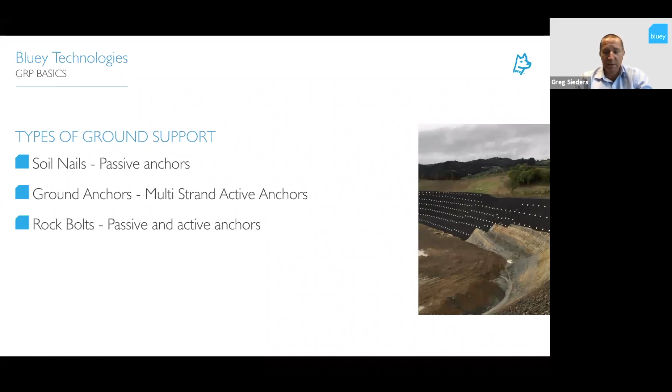The other option for corrosion protection is galvanizing, which does not give you the 100-year design life that double corrosion protection gives you. Other options in the marketplace are doing an epoxy coating, which can give you extended durability over galvanizing.

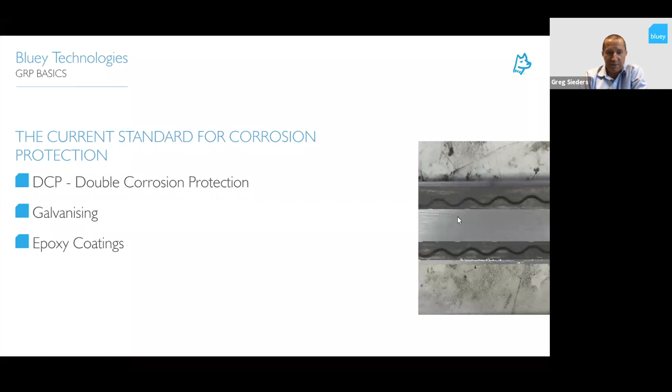These are the international standards for soil nailing and ground anchors that we mostly refer to across the marketplaces. BS 8006 is the British standard for soil nailing, 8081 is for your ground anchors or grouted multi-strand anchors, and then we have VicRoads Section 683 for soil nail walls.

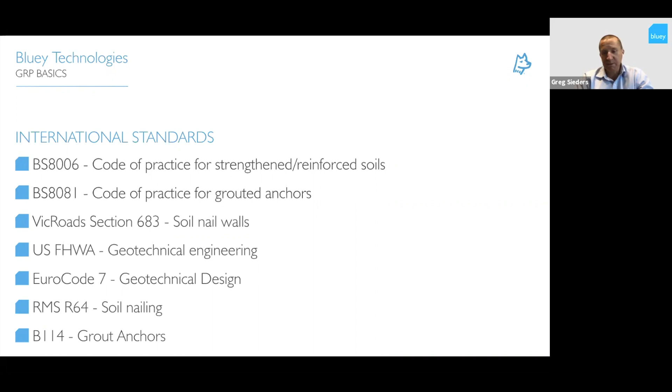So the Bluey GRP basics. What is GRP? GRP is referred to as glass fibre reinforced plastic or polymer. It can be noted as GRP, FRP, GFRP - they're all one and the same, made out of glass fibres. The last one, CFRP, is a carbon fibre, generally used for structural strengthening, not for your soil nailing or anchoring market, and a lot more expensive in that application.

For this purpose, in the presentation, we'll be referring to GRP, which is a continuously threaded bar.

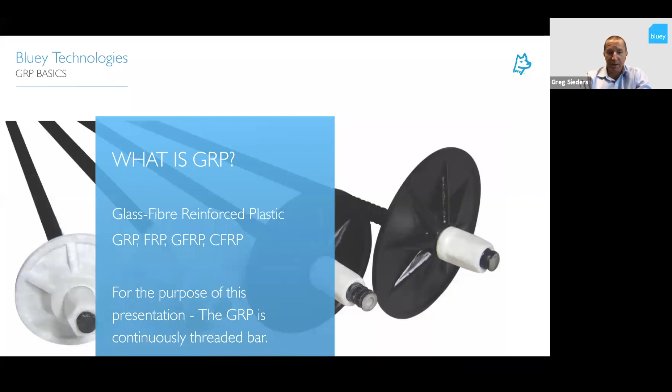How is GRP made? The most common practice for manufacturing GRP is a pultrusion process. You have a fibre bank at the back of the machine which has all the fibres, gets pulled through some machines into a resin bath, and then it comes out the other end in different shapes - can be made into straight bars, threaded bars, a whole range of different forms made out of GRP.

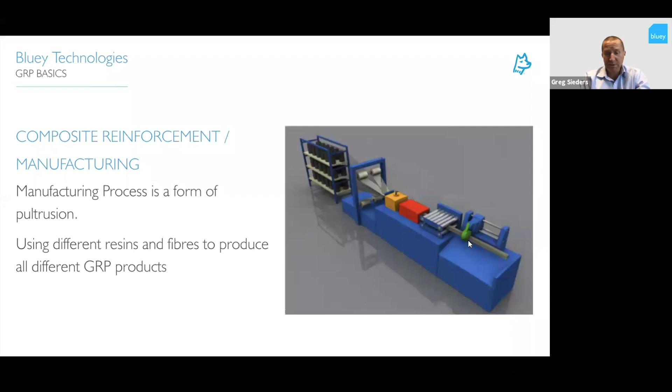There are different resins and different fibres used depending on the application, but the most common used for the standards are glass fibres, which are 1000 MPa. Like we talked about before, carbon fibres are generally used for structural strengthening in the reinforcement market. And then the critical part is the resins that get used.

There are 3 different types of resins used to manufacture GRP. Vinyl ester is utilised for permanent applications, and we'll cover further in the presentation why that's used and the testing that goes with that to justify the design life of the bars. Polyester is probably the most common for the mining market because they're a temporary application, so they can be used and then cut through later on, also in the tunnelling market for your soft eyes and temporary face support. And epoxy is more utilised for your self-drilling GRP anchors.

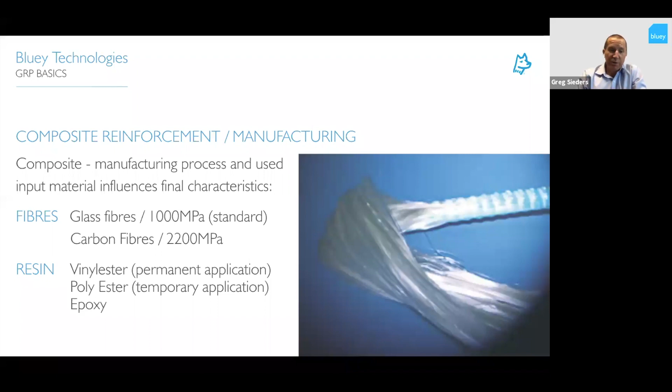So these are different types of bars that get pultruded and the different profiles. The most common up to about 5-10 years ago was the straight bars on your right-hand side. You'd pultrude a straight bar and then sand seed it to give you your bond to your concrete. So very common in your reinforcement market.

The most recent developments are the ones in the middle, and these are the bars that Bluey produces into the marketplace, which is a fully threaded GRP bar. You can see there, the fibres are actually wound around the bars to create the thread profile, where traditionally they would have to use a straight bar and then cut a thread into it, which wasn't very strong and didn't give you a lot of load on your nuts and plates.

And on the left-hand side there, you can just see different applications. You can make mesh out of the bars. You can do grates. You can do a whole heap of things with GRP.

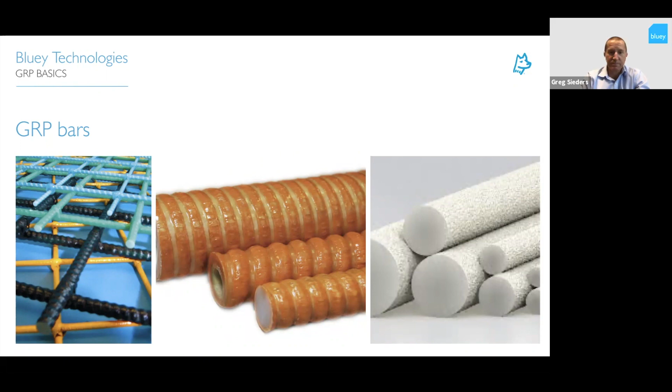So this is just a cross section of the threaded bars. You can actually see the longitudinal section showing the threads running right through the fibers of the bars. That's giving a lot more strength. You're not breaking any of the threads when you're manufacturing the bars, so it allows you to put a lot more load onto the nuts and plates.

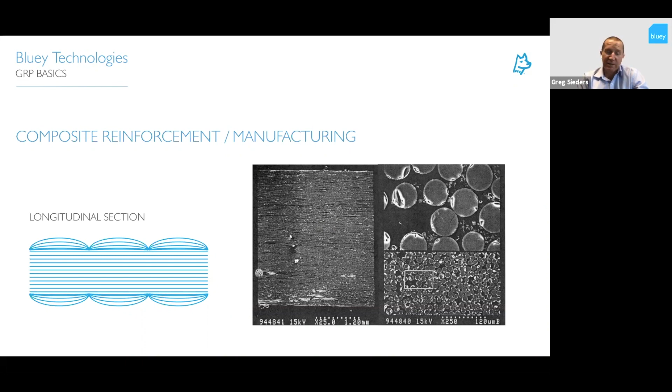So we'll cover across some applications and benefits. Why do we use GRP for the applications of soil nailing and ground anchors? One is durability, 100-year design life. It's got very high tensile and shear strength.

Traditionally, people would think that GRP is weak in shear, and probably 10, 15 years ago, it did have a weak shear strength. But with the latest designs and manufacturing processes, the shear capacity has increased, and I'll cover that later on. A big advantage is it's non-conductive, so there's no stray currents for corrosion issues.

For the rail corridors and into power substations. Another big advantage is lightweight - it's a quarter of the weight of steel, but double the strength. So there's less equipment used to handle it on site, less crane movements, less chance of any injuries or risks to the applicators.

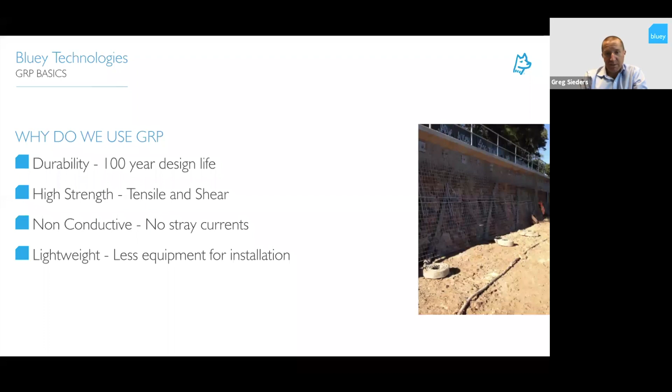So where can we use GRP to replace steel? We're looking at face and slope stability with soil nailing, ground support, rock bolting within tunneling environments, reinforcement for marine and tunneling and for bridges, and also for permanent and temporary applications. It was usually known as a temporary application for the mining market, but with the international standards and testing requirements that have come out, there's certainly now permanent applications that the products can be used for and are used for regularly.

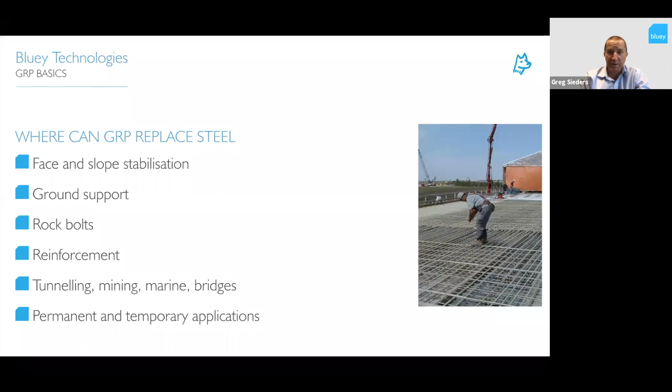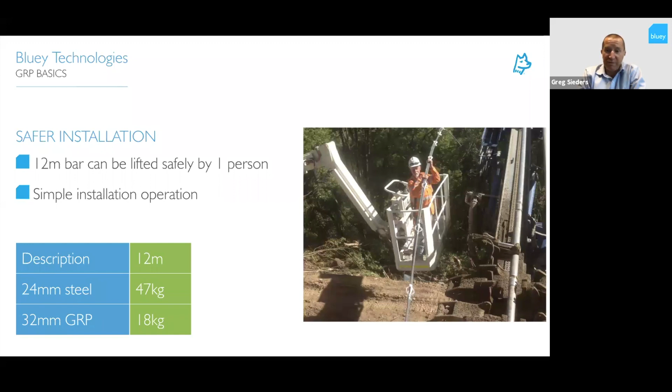Like we talked about, the GRP is very safe to install. It's very lightweight - one person can handle a GRP bar quite easily. You can see on the photo there, you've got one person in a cherry picker putting in a 12 meter bar by hand, where if that was a steel bar the same length, that would weigh about 50 kilos, so you'd need a crane to lift that bar up in place.

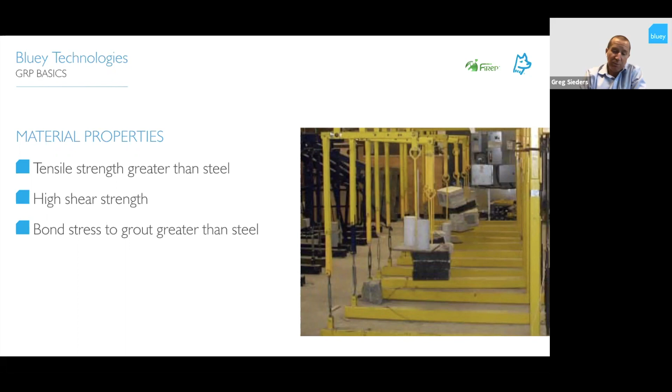Like we talked about, the properties of GRP - you've got tensile strength greater than steel. You're looking at a 1000 MPa bar compared to a 500 MPa steel bar. Very high shear strength, and you've got a good bond stress for the grout, greater than steel, and we'll cover that later on in the presentation.

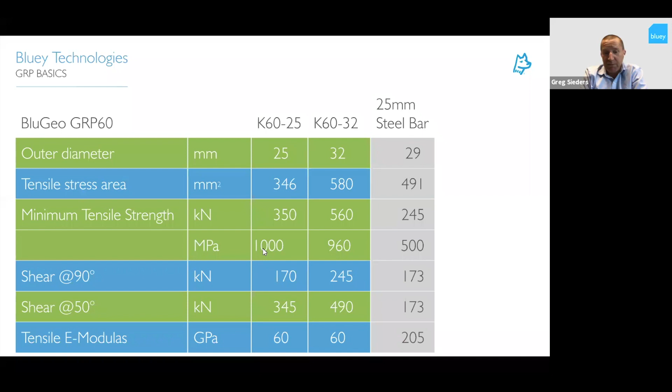In a soil nail application, when you're looking at 50-degree shear, bit of tension into the fibers, you actually increase the shear capacity of the GRP bar. And we'll cover that in the testing aspects a little bit later on.

So durability, like we talked about, 100-year design life on the GRP. You're not relying on all the aspects of double corrosion protection to give you your design life. You're not relying on galvanizing and DCP applications where something can go wrong in the application or manufacture of the DCP or installation, to quite simply putting the bar in the hole with the grout to give you your design life. Another big advantage is there's no minimum cover requirements for GRP, so you can actually reduce your hole size of your soil nail or your anchor. As long as you can get the same skin friction out of the smaller size hole, you can save a lot of time and money in those applications.

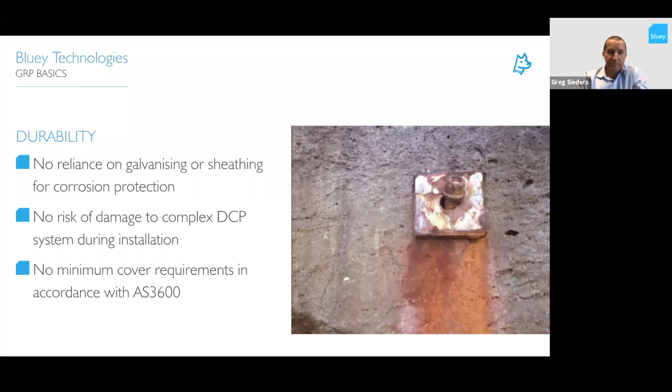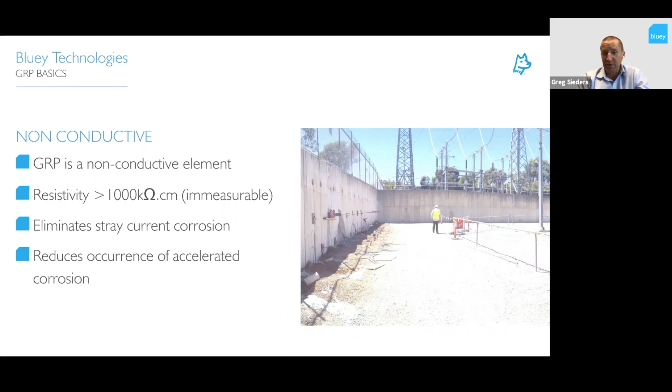Again, GRP is non-conductive, so it eliminates any stray current corrosion for your rail corridors. It can be put into substations, and be a lot safer to handle in those environments for the contractors.

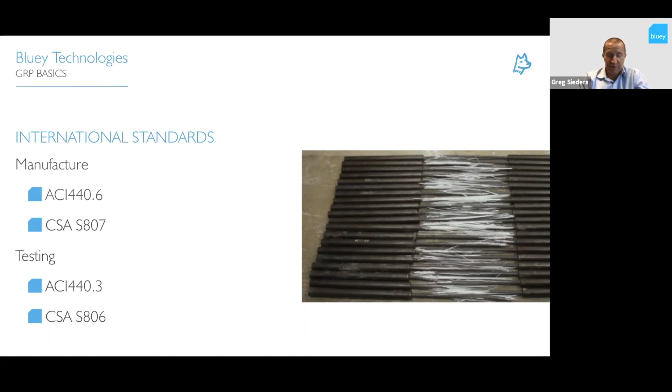So what we'll cover here now is all the product testing that gets carried out, what standards are applied for the testing of the manufacture of the GRP, and also for the testing of the GRP once the bar is being produced. The two main standards referred to for GRP manufacture and testing are both the American ACI 440 series and the Canadian CSA S807 and S806 for testing. These cover, from the manufacturer's point of view, what type of resins and fibers need to be used, and also the minimum criteria for batch testing on the manufacturer side. Then in the testing standards, it lays out the minimum type of testing that you have to do on the bars to work out what performance you have out of your GRP.

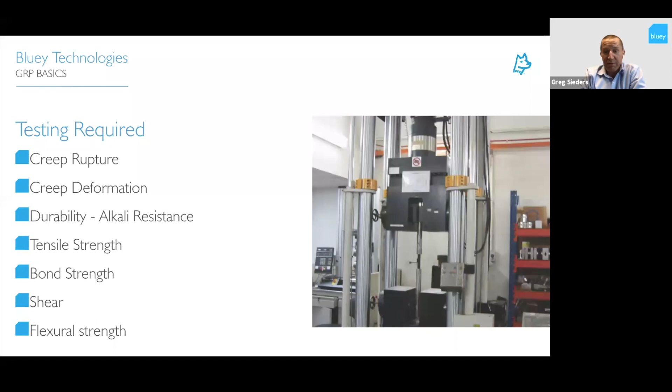No GRP bars are the same, so you can't rely on one person's testing on a GRP bar and apply that as a rule of thumb for all GRP bars. So when designers and engineers are looking at the design of a soldier wall and utilising a GRP bar, they have to refer to the testing supplied by the manufacturer for each individual bar to work out the creep rupture, the deformation, the durability performance, and the tensile and bond strength. They all have different properties, and that's why the testing standards are set in place to make sure there is an even playing field and you're getting a high quality product.

I'll just cover some of the critical testing. Creep rupture is one of the main tests that needs to be carried out for a GRP bar. It measures the maximum long-term load that can be applied to a GRP bar. At one point in its life under load, the GRP can rupture, so you've got to work out, to the standards, where it won't rupture. The standard requires a minimum of 5 test loads to be tested. Then they'll plot that out to work out where your rupture point is and where it won't rupture. You've got to hold that until it ruptures, or for a minimum of 10,000 hours. 10,000 hours is equivalent to about 13 months of testing, so it's a lot of testing that needs to happen. And we've done this about 4 times on our bars.

Every couple of years, we get bars sent over to the University of Sherbrooke in Canada to get them to retest it, to make sure that we're getting the same quality out of the fibres, out of the resins, and out of the manufacturing process.

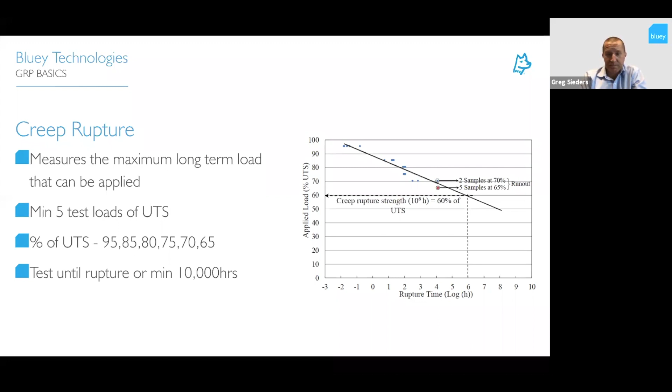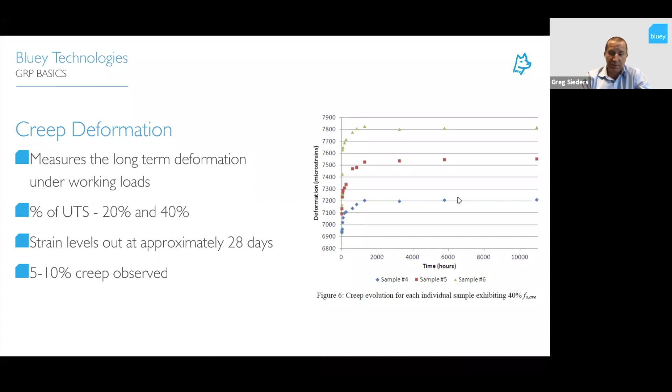So alkali resistance, this is another critical testing for the GRP. This is testing the durability and retained strength in an alkaline environment. Part of the standard is you have to test in an alkaline bath at 13.5 pH at 60 degrees, soaked for 3 months. The test standards say you've got to have greater than 80% retention of your UTS and your modulus to be classified as a Class A.

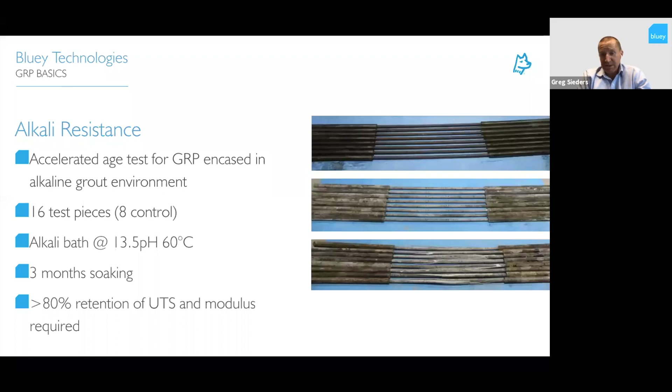Our bars on the marketplace, our GRP 60s, get about 98% retention of the UTS and 100% retention of the modulus. Some bars we've tested from different suppliers, and test results we've seen, can come back around 40 or 50% capacity or even lower. So this is why you've got to rely on individual tests for each product on the marketplace, and not take one person's testing and apply that to every single bar.

Tensile strength - this is standard testing that gets done at time of manufacture. It also gets done as local testing when we import the bars, testing the tensile strength, the modulus, and the tensile strain. Just like a steel product, we get batch testing done on every single batch produced to make sure we're getting the same capacity or the minimum standards. And when the product arrives in the country, we get local NATA testing as well to back up the testing for the local authorities.

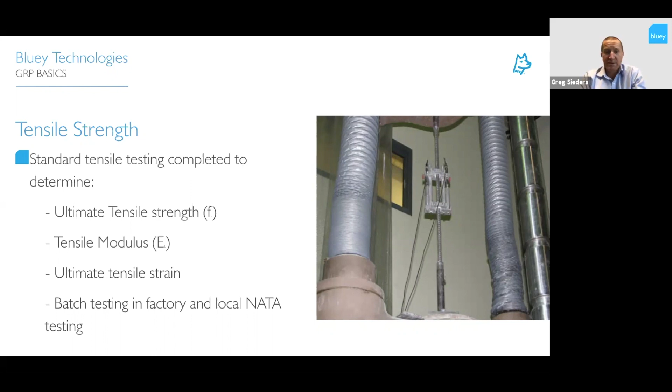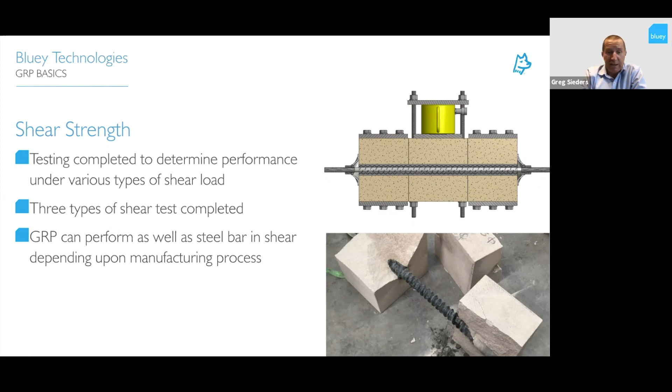So shear testing - there's a lot of shear testing that we've performed on our bars to justify the performance of the product, showing that it's equivalent to steel or greater than steel. I'll carry you through those testings now.

The first one was the transverse shear traditional testing in accordance to the ACI and CSA standards, direct double shear to failure. A 20 mil bar has 130 kilonewtons, and a 25 mil bar, what we talked about, has 170 kilonewtons in this testing.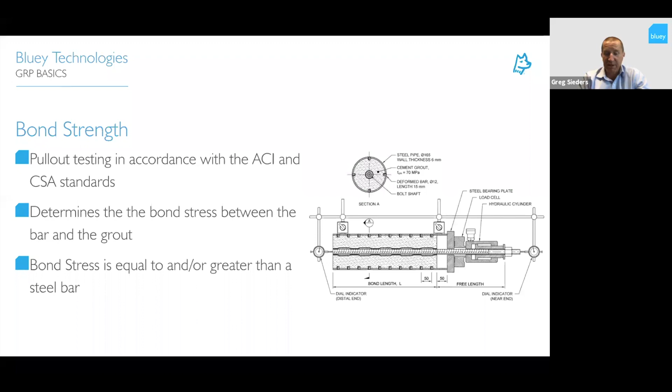So this is just the structural assessment, which comes off the back of all the testing to work out the reduction factors we apply to the GRP for design. We'll go into a lot more detail in the coming weeks when we do a full design assessment of GRPs for soil nailing. There's two main standards, the BS8006 and the CIRIA guide.

The main reduction factors are your creep rupture and your durability, which come out of the tests we've done previously. For creep rupture, we apply a 0.6 reduction factor - meaning anything below 60% of load, the GRP bar won't rupture. And for durability, we apply a factor of 0.65, a conservative number based on the standards. When you add both of those together, we're using a maximum of 40% capacity of the GRP bar. So at that point, we'll never have any creep rupture because we're only at 40% capacity, and there's still a lot more redundancy left in the design of the bar.

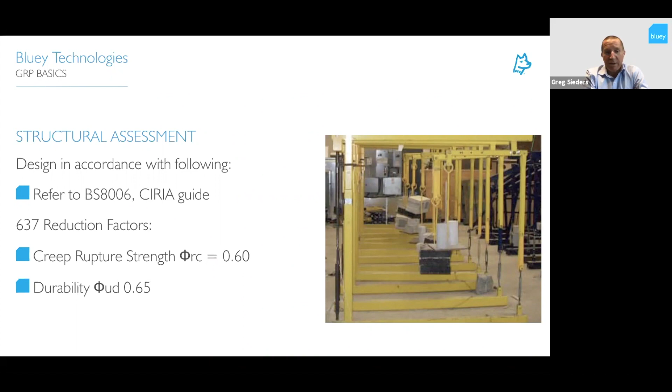For a GRP element, we're looking at the design failure being a ductile failure, whereas GRP itself is a brittle failure. The way we work around that is that the failure mechanism will be between the grout-soil interface.

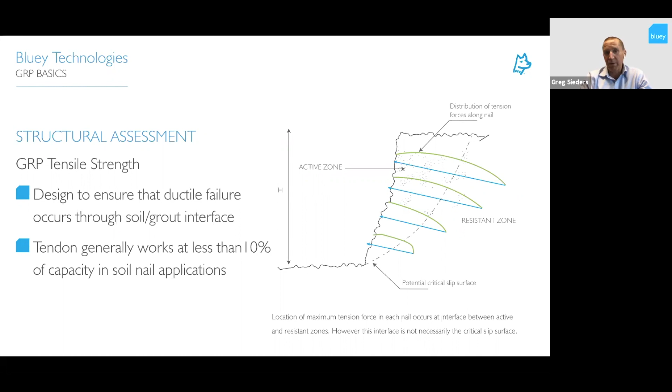So the bar itself won't go into failure; we'll get a ductile failure at the grout-soil interface. The tendon is generally only working at about 10% capacity in a soil nail application, so your bar will pull out of the ground well before you have any failure of your GRP bar. This is where we're just demonstrating that.

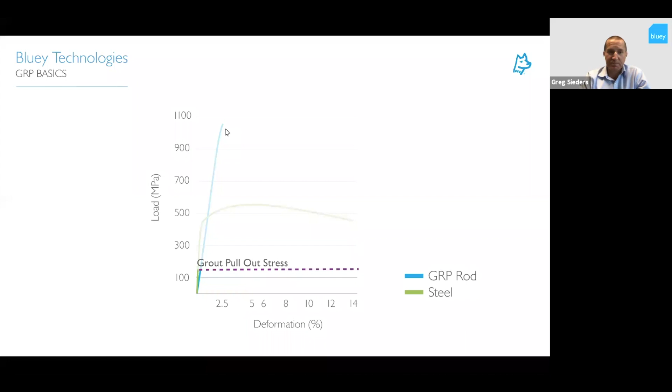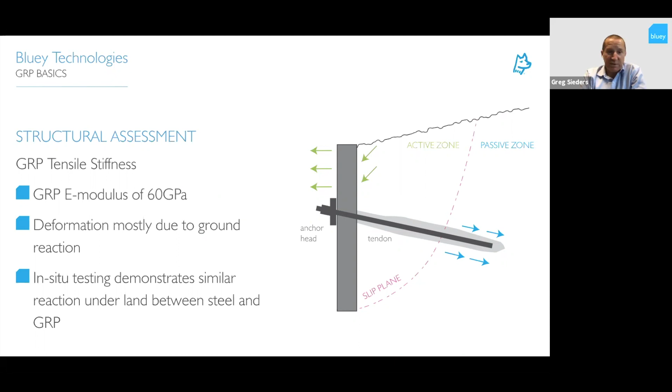And that's where we talked about the modulus of the GRP. Being a more flexible bar, you'll see a lot more. If you do have it going up to higher loads, you'll see more deformation in your GRP bar, and you'll see cracking in your shotcrete facing and the likes. But most of your deformation generally occurs at the grout-soil interface. We've done extensive in-situ testing between a GRP and steel bar side by side to justify this and show designers and authorities where the deformation is happening. That's what we'll cover off to show you here.

So this is a side-by-side test we had carried out. On the left-hand side is showing the steel deformation. Having a higher modulus, you're only getting about 3 mil deformation in your free length. In a GRP, you would expect to get 3 or 4 times that deformation in your free length. But when you return back to your datum point of zero, you can see both of them only having about 0.7 mil of deformation, which is all at your grout-soil interface.

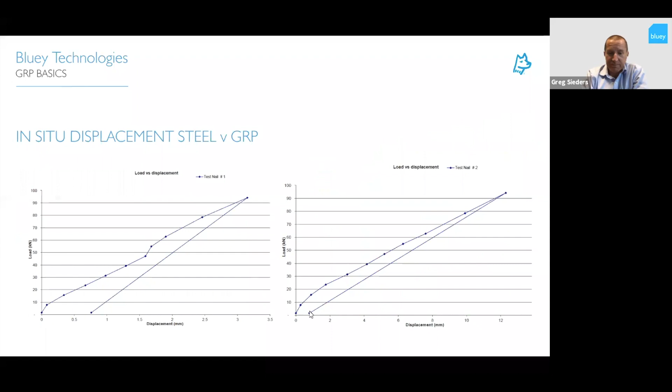So what we'll cover now is your GRP approvals. We've done a lot of work in Australia, working with the local authorities and train networks around Australia, to get the product approved for different applications. The first one that helped out a lot was the British standard back in 2011, allowing for GRP bars to be used in permanent applications in soil nailing.

Off the back of that, we've done a lot of testing and presentations to the road authorities in Australia to get that updated. VicRoads was one of the early ones that came on board and changed the specification back in 2012 to allow for GRP soil nailing for permanent applications. More recently, Metro Trains in Victoria type-approved our GRP bar — you can see the certificate there on the right, back in 2017. TMR up in Queensland had approvals and our first projects back in 2014, same as DPTI, which is South Australia.

NZTA's first project over there and approvals was back in 2013, which was for the Waterview project, and SCIRT was for the rebuild of Christchurch. We've done a lot of work down there in the earthquake zones to help rebuild Sumner Road and the likes. And also the Eurocode 7, which is the European Code for Geotechnical Applications, approves the GRP for permanent applications.

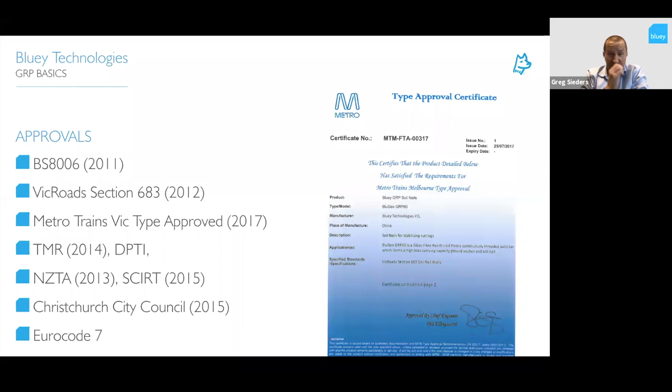And I think that is everything at the moment. So a little bit of a short and sweet brief overview of GRP in the soil nailing market.